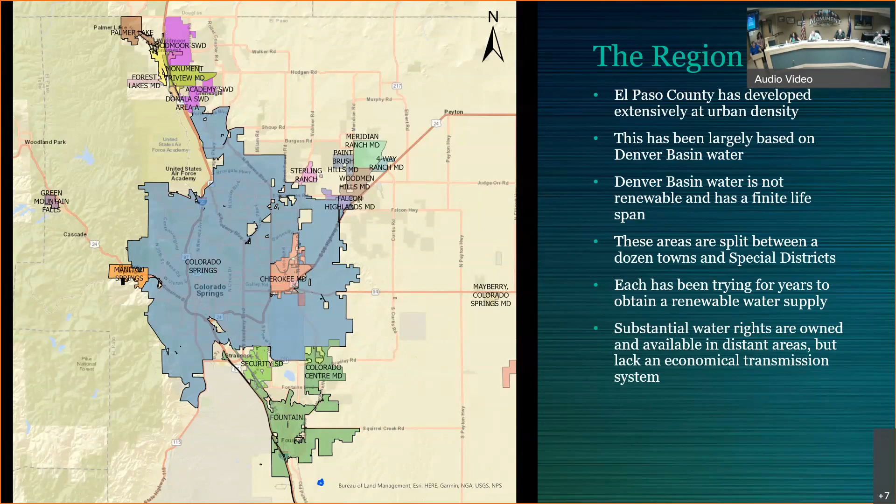There's some debate on the Dawson Aquifer and how much recharge it may or may not get, but ultimately I think the take home for this discussion is Mother Nature's not recharging these aquifers, and there's a lot of people with straws down in them. Over in Woodmoor, we see declines of anywhere from 15 to 30 vertical feet per year in our wells, and they continue to decline. What that means is the production rates decline with it. So even if we shut the door on growth and said we weren't going to allow another tap, we're still going to have to continue to drill wells just to maintain our current level of water supply.

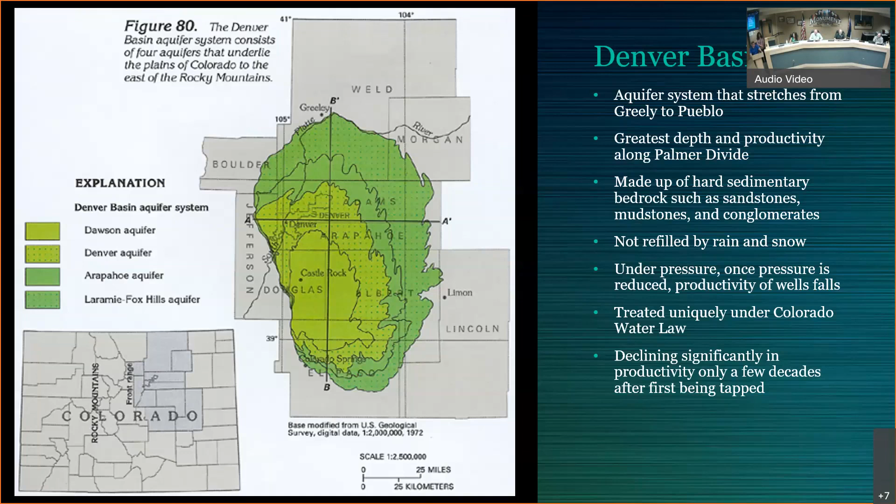That's what a lot of us face here, especially along the Front Range, when we're dependent upon Denver Basin aquifers. I can tell you right now, although Woodmoor owns a healthy portfolio of renewable water rights on Fountain Creek down by the city of Fountain, as Amy indicated, we don't currently have a way of going down there and piping those water rights up. So we are still, and always have been, 100% dependent on Denver Basin groundwater. Next slide, please.

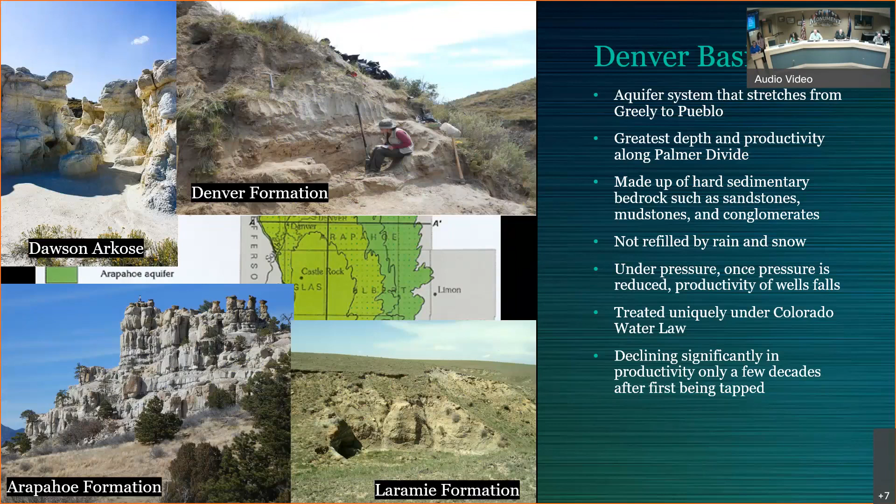Okay, just an example of what I'm talking about here.

With the Denver Basin aquifers, you hit diminishing returns as the water levels drop, and so do your production rates. Incrementally, it takes more wells, more money, and more effort in order to keep your production rate the same.

That's what you normally need to supply your community. Growth just exacerbates the problem. You've got to drill even more wells in order to supply water service to new customers. So the diminishing returns basically means well water is just going to get more and more expensive over time.

Just to give you an example, in Woodmoor we drilled a brand new Arapahoe well two years ago. We're probably looking at drilling another one next year, if not the following year. We'll probably be on that kind of time step with well drilling in the near term, given the growth that we're looking at.

So it's somewhat akin to mining Bitcoin. The next Bitcoin to fall out of the blockchain requires more computing power, more electricity, more inputs, more energy, and therefore more dollars. Mining Denver Basin aquifer water is about the same.

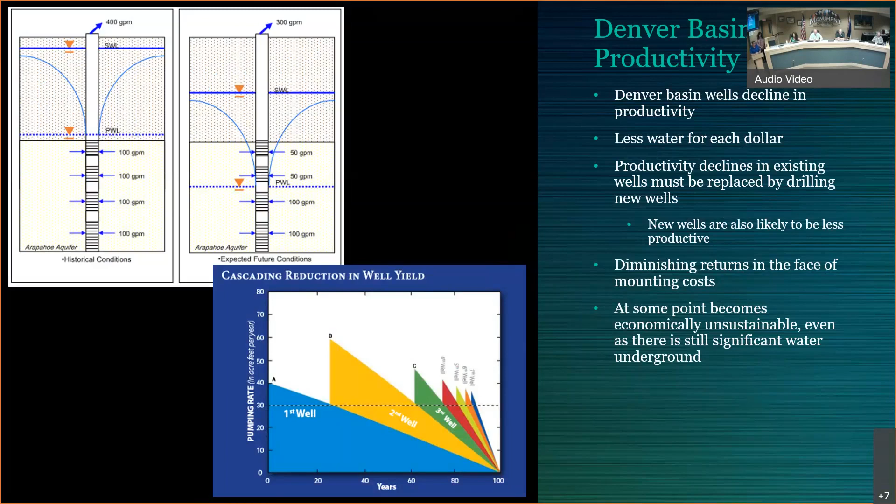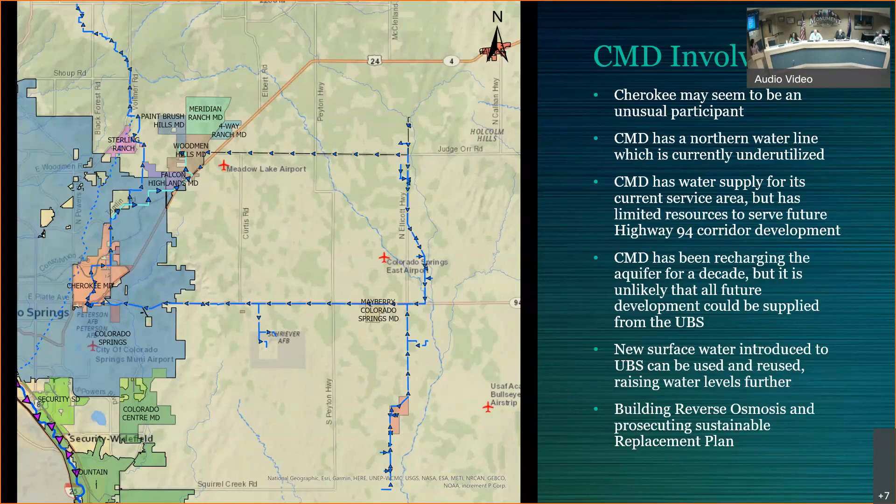So here is a nice map, shown mostly schematically, of the loop. The portion of the pipeline you see from essentially the north end of Cherokee all the way up to the intersection of Black Forest and Hodgen Road is the Sundance Pipeline. That's the 24-inch pipeline infrastructure that Cherokee Metropolitan District installed a number of years ago, and that particular portion of pipeline exists right now.

Down at the very bottom, the loop starts essentially at Callahan Reservoir. Woodmoor Water owns Callahan Reservoir and about 3,000 acres surrounding it down in the southern portion of the county. In addition, Woodmoor is also a majority shareholder in the Chilcott Ditch Company, a historically agricultural irrigation ditch company that drafts water rights off of Fountain Creek down a ditch about 8 miles and terminates them in Callahan Reservoir.

The thought process would be that anybody who wanted to participate, whether they had water rights on Fountain Creek they could draft off and put into the system, or if all they had was their non-tributary Denver Basin return flows discharged out of their wastewater treatment facilities, could at a bare bones minimum recapture their non-tributary wastewater effluent return flows and reuse them, transport them back up to the loop, reuse them, and then a portion would get discharged back into the creek, redrafted off down south at the Chilcott Ditch, and run back into the reservoir.

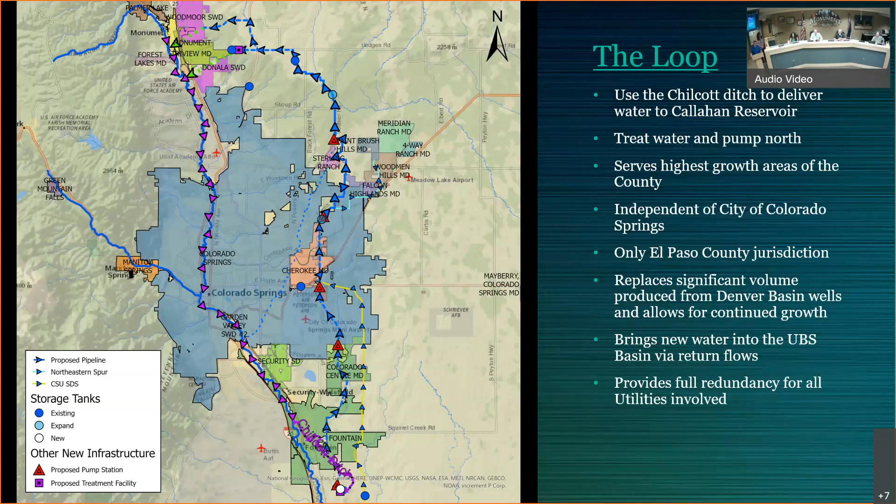Okay, a little more detail, a little more zoomed in. Here's the southern portion of the loop. At the bottom of the page you'll have Callahan Reservoir, and then the pipeline would run north, across Chilcott Ditch shown in purple, and continue north up to Cherokee, connecting into the Sundance Pipeline.

When water gets looped around and discharged into Fountain Creek or Monument Creek, which is tributary to Fountain Creek, the reusable water molecules that people can recapture and reuse would get redrafted off at the Chilcott Ditch headgate located on Fountain Creek, and then run back through the loop again.

What's also shown there on the right-hand side, or to the east, is, I believe, blue triangles and a yellow line. That's Colorado Springs' southern delivery system. Their Williams Creek pump station is about three-quarters of a mile due east of Callahan Reservoir.

So we see this project not as competing with the convey, treat, and deliver regional concepts that Colorado Springs is working on, but rather as two projects that can benefit from one another in terms of resiliency and other things. Next slide, please.

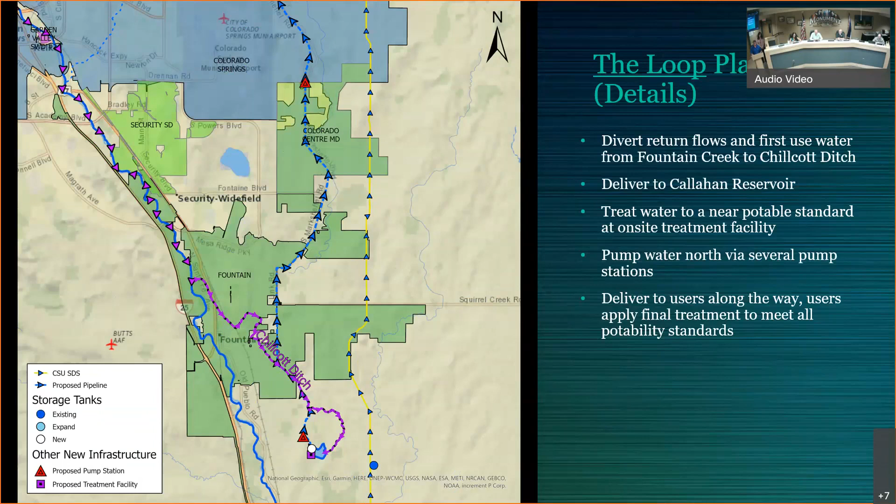And the big question, like we started in the beginning: what's the problem? The problem set is the Denver Basin wells—their sustainability, their pricing, their cost overall, and in the long term. How do we take the pressure off? How do we help resolve that? How do we have redundancy?

We've talked with all of these folks. They recognize this is a way for them to have the kinds of redundancy they need, especially when they have failures or reduced production in their well systems. So this is something that will allow for long-term sustainability, not only for existing customers and providers but certainly for new customers as they come online.

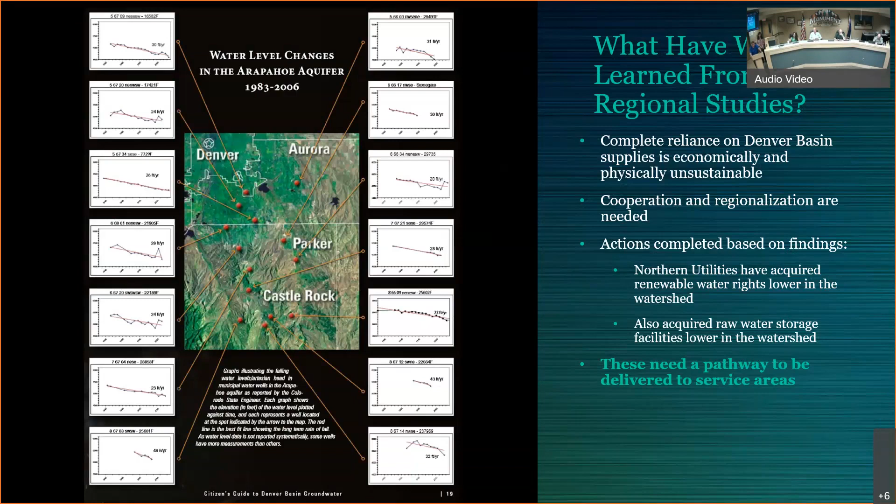So in terms of water yield, it's about 1.24 to 1.82. This is the concept I was talking about: you take a molecule of water, suck it out of the Denver Basin, non-tributary to the stream system, and send it to your customers. Hypothetically, half gets put on the ground for irrigation, the other half is internal use, runs down the drains, ends up at the wastewater treatment facility, gets cleansed and discharged into the creek. That molecule, or half a molecule in this instance, is reusable to extinction.

So you can draft it off the river at the Chilcot Ditch head gate, run it through the system. It comes back, gets cut in half again, a quarter runs into the stream system, and you go round and round and round. By the time it gets used to extinction, accounting for losses in the reservoir from evaporation, stream flow losses, transit loss down Fountain Creek, and transit loss in the ditch system, you come up with, on this diverging series, a multiplier of about 1.24 to 1.82, depending on if you line the ditch and do some other things that reduce losses.

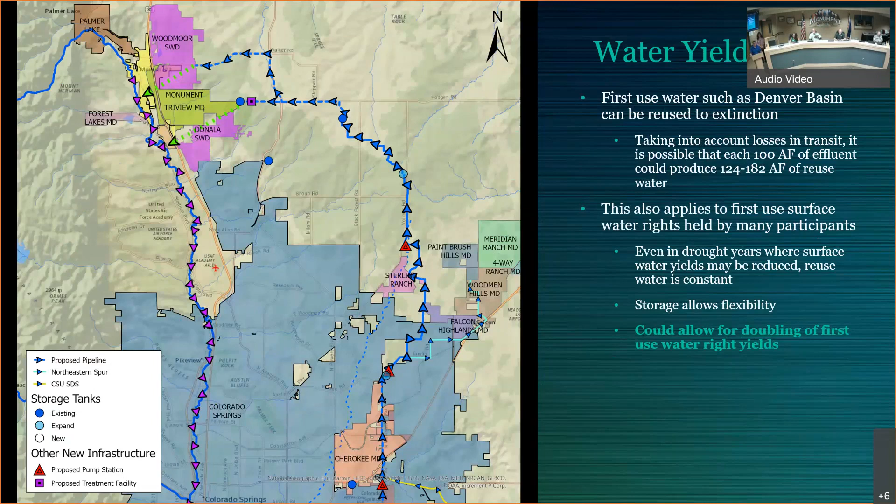So in terms of alternatives, this particular project, the Loop project, with just a little bit more infrastructure, could connect up easily to Colorado Springs Utilities and the Southern Delivery System. So just because an entity might favor Colorado Springs Utilities, or think that's the direction they want to head with a convey, treat, and deliver contract through them, doesn't mean they can't participate in the Loop project. They could participate in the Loop project and all its facilities.

Instead of running their molecules of water through the Loop, we just take them out of the reservoir, treat them to an almost potable standard, and then they can boost that water directly into the Colorado Springs Utilities raw water system. It would flow north up the SDS pipeline, get cleansed and treated to potable standards at Colorado Springs' new Bailey water treatment facility, and then get discharged to that particular convey-treat customer, however their contract reads.

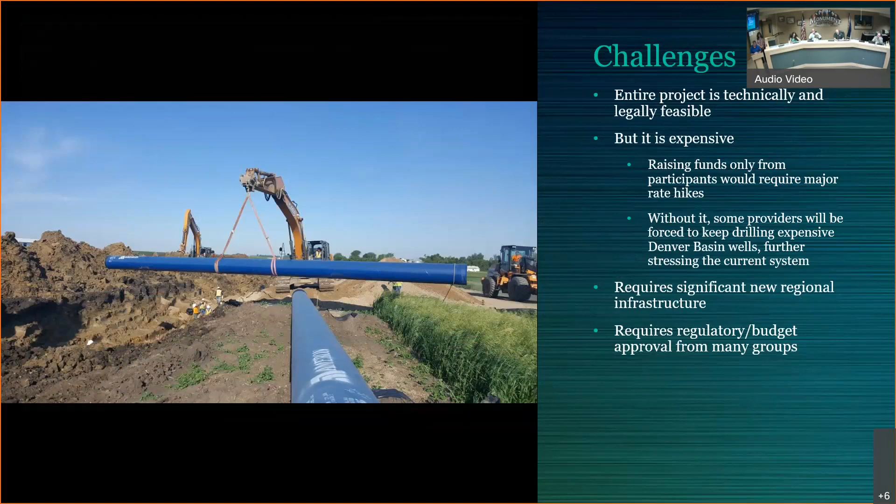Thank you. My favorite slide. I've also spent years in this county looking at all these water issues, 9 years over at El Paso County with the commissioners there, and we've been having this conversation for a long time — years here with Cherokee and working with this regional group. I think we're closer now than maybe ever before with a very real, very realistic and possible water connection.

I know that 134 million sounds like a lot of money, and it is. You have to look at water pipeline costs right now — you can't even look at a mile of pipeline before spending $1 million, and that's probably the lowest possible estimate per mile. That doesn't include your lift stations and your treatment. So it is very expensive to move water around the region.

But water is absolute. And if you don't have water, then all the highway issues, all the DHS issues, and all the funding issues that we all talk about — that you as a board talk about for your town, and everyone talks about on a municipal level, a county level, et cetera — doesn't really matter, because you have to have water.

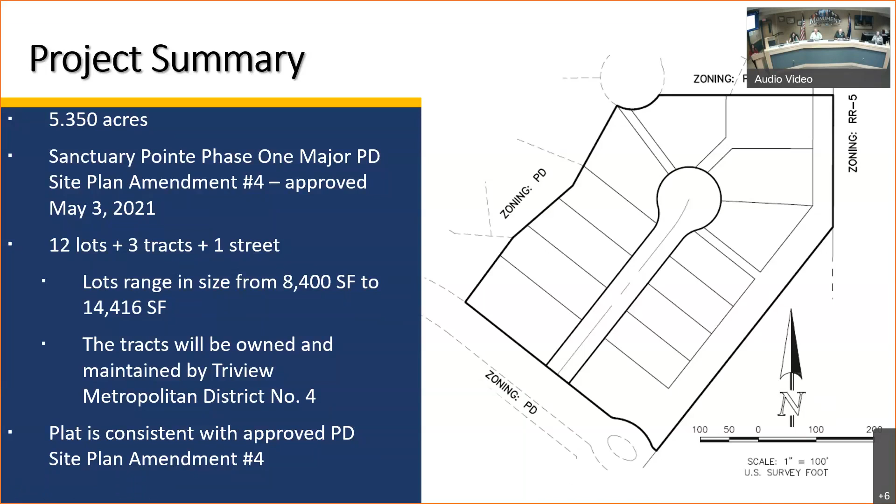Any other questions from the board for town staff or the applicant? This is a public hearing item, so I will open it up to the public. Mr. Anderson, do we have anyone online that would like to speak for or against this item? Do we have anyone here that would like to speak for or against this item? Sir, would you please come up?

Mr. Mayor and town trustees, I suspect nothing will be achieved by my statement, but someone has to say it. Best I can tell, Monument started out with roughly 560 acres of forest. This was done by measuring areas on Google Earth with their measuring tool. We now have roughly 310 acres left because Classic cut down approximately 250 acres of trees, almost half of all the forest in the town of Monument. There is never a reason to have 6,000 square foot lots in the middle of a forest, as Sanctuary Pointe does.

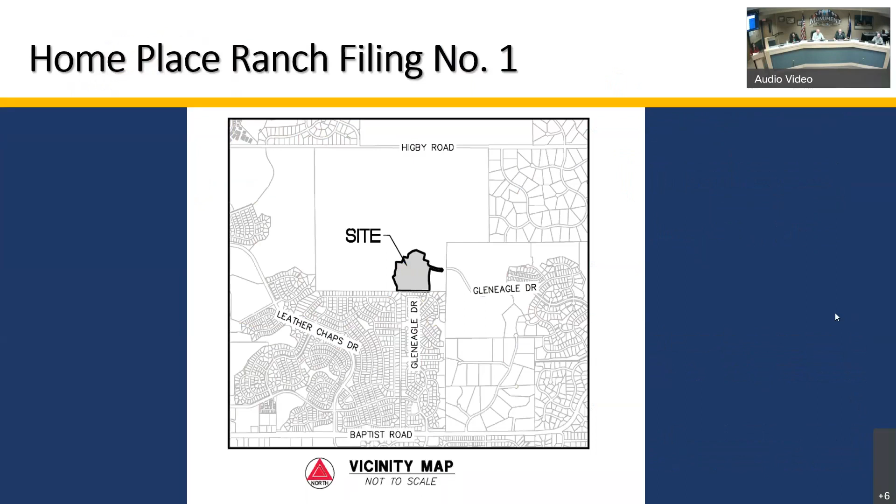It's north of Gleneagle Drive and north of Homestead at Jackson Creek, and west of Sanctuary Pointe. Sorry, forgot to put the map up. Filing number 1 is 22.3 acres in size. Home Place Ranch Phase 1 Minor PD Site Plan Amendment number 1 was approved administratively in August 2021.

The changes made in the minor amendment depict an increase of 8 single-family detached lots, from 67 to 75. Future filings will balance out the approved 300 lots.

The applicant will construct Sanctuary Rim Drive to the town's roadway standards with their construction document submittal. Also, prior to recording the final plat for filings 4, 5, 6, or 7, Home Place Ranch LLC shall construct an interim extension of Gleneagle Drive, extending from the north side of the intersection of Gleneagle Drive and Sanctuary Rim Drive up to Higby Road. The roadway shall have a minimum paved width of 33 feet, and the 90-foot right-of-way for the roadway shall also be dedicated at this time. This requirement shall be waived if the full design of this segment of road and the proposed improvements on Higby Road have been approved and funded through agreements currently pending with Triview Metro District.

Filing number 1 consists of 75 lots, which makes up about 42% of the filing, 6 tracts and 7 streets. The lots range in size from 4,467 square feet to 10,555 square feet.

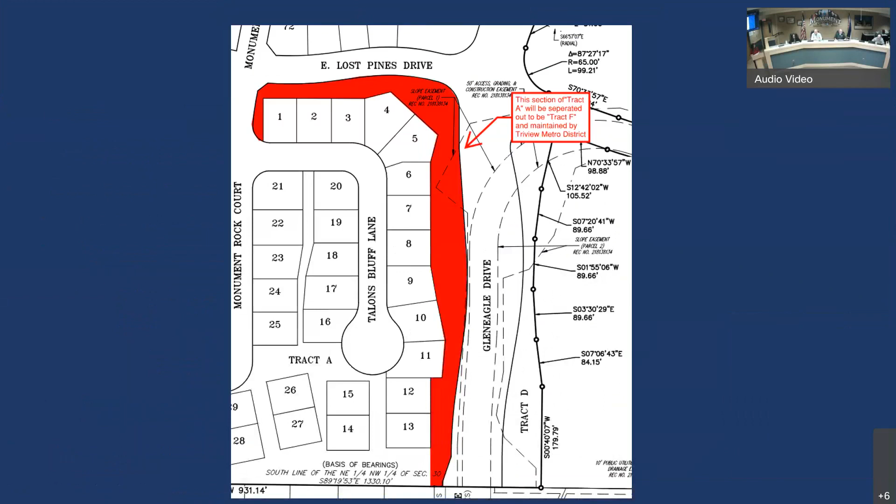The tracts and open space will be owned and maintained by Triview Metro District number 3. Tract A will be split into 2 tracts, Tract A and F, and said tracts be depicted as part of the final plat prior to recordation. As shown here, this was not included in the plat that you reviewed for tonight's hearing; this will be a condition presented later in the presentation.

These 2 tracts will be owned and maintained by Triview District number 1. Tracts A through F will serve a variety of purposes, including public utilities, landscaping, and drainage. Water and wastewater services will be provided by Triview Metro District number 3. The plat is consistent with the approved minor PD site plan amendment number 1, and all applicable code standards are met.

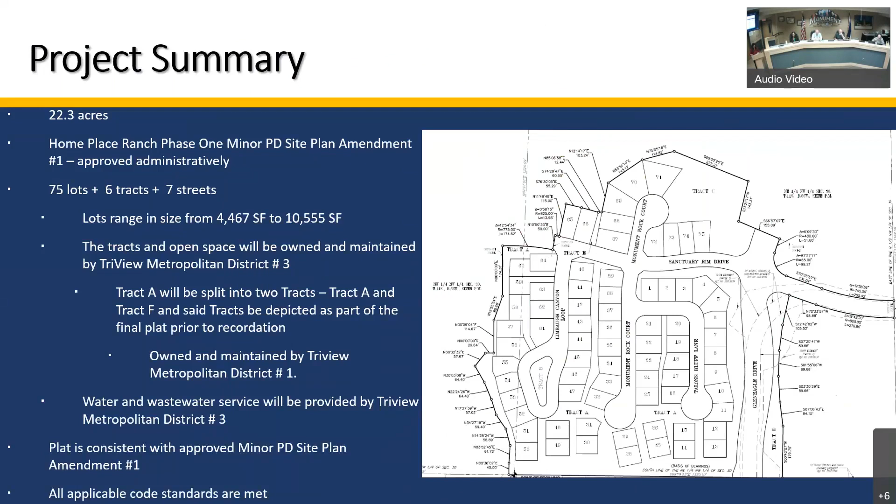Next, it's Home Place Ranch filing number 2. This is within phase 1 of Home Place Ranch, west of filing number 1, north of Homestead at Jackson Creek, and west of Sanctuary Pointe.

Filing number 2 is 16.6 acres in size. Home Place Ranch phase 1 minor PD site plan amendment was approved administratively in August 2021. The changes made in the minor amendment depicted a decrease of 3 single-family detached lots from 70 to 67. Future filings will balance out the approved 300 lots of Home Place Ranch.

Filing number 2 consists of 67 lots, which makes up about 61% of this filing, 2 tracks and 5 streets. Lots range in size from 5,292 square feet to 10,437 square feet.

The tracks and open space will be owned and maintained by Triview Metro District number 3. Tracks A and B serve as a variety of purposes, including public utilities, landscaping, and drainage. Wastewater and water services will be provided by Triview Metro District number 3.

The plat is consistent with the approved minor PD site plan amendment number 1, and all applicable code standards are met.

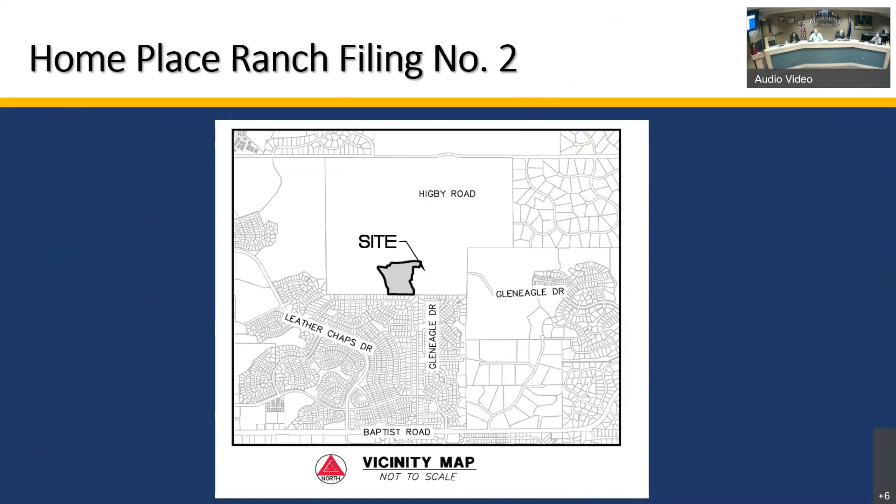Let me just go back to show you what that was again. And that was this. Next. Sorry to make you dizzy.

Planning Commission recommendation for Home Place Ranch, filing number 2. The Planning Commission recommends approval of resolution number 56, 2021, final plat of Home Place Ranch, filing number 2, based on the findings that the final plat complies with the review and approval criteria from the Town of Monument Municipal Code, Section 18.02.260.c. And the applicants are here tonight from HR Green to answer any questions that you may have.

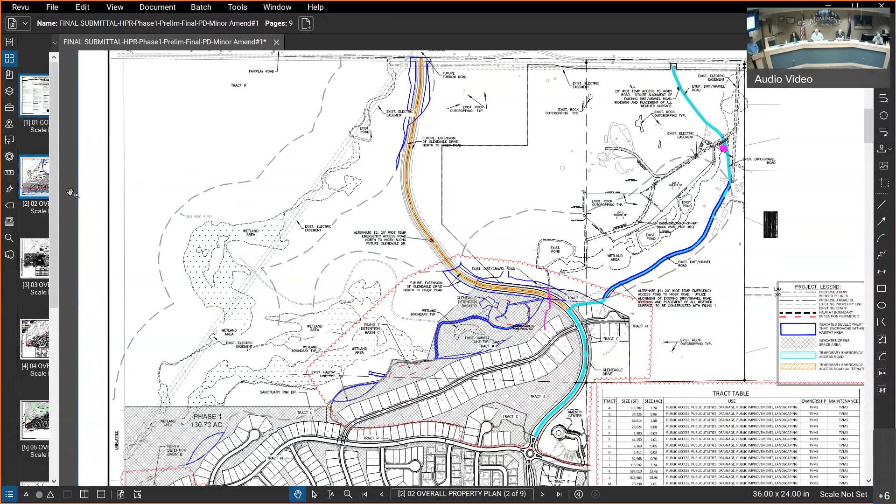Okay, so I guess the ultimate build out, I don't know, Ken, you want to speak to the ultimate build out of it at all? So yeah, the ultimate build out for Gleneagle, for the approved phase 1 for Home Place Ranch, was not included. So any future extension of the permanent road would be part of a phase 2 of Home Place Ranch or via another funding mechanism that I know the Tri-View Metro District is trying to work together to get that road extended. But in terms of the obligation for phase 1, the obligation is just to do the temporary road so that there's enough time for Tri-View to work out those agreements and also time for Higby Road to get improved

to a level where it's safe to connect to it. That was one of the issues that the county had, and it should be the same issue with the town having ownership—sight distances and a lot of issues with that intersecting or that connection, getting all that extra traffic up on Higby. So I know you're all aware of some planned improvements on Higby down the road. So until those improvements take place, it's not a real good idea to put all that permanent traffic out.

Okay. Other questions from the board? I guess I'm curious about the density. This meets our density, but these lots are tiny. They're postage stamps, if not less.

4,500 square feet. I don't know how many there are going to be that small. Some are going to be sub 6,000 square feet. What's the product that you're putting on these lots? Are these houses—single detached homes?

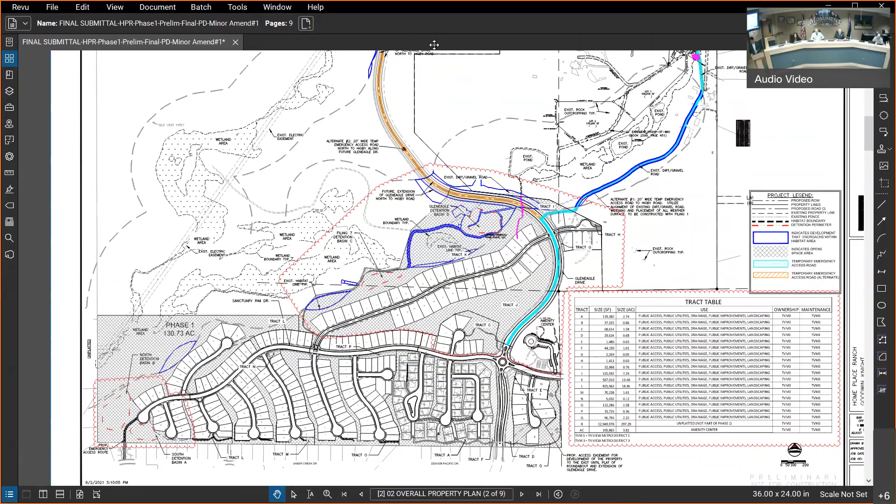Okay, and then I just want to reiterate something on the roads that Trustee Stevens brought up. So can you bring up a map of the first phase and the ingress and egress? Where is it going to be the primary entry to the development?

Gleneagle Drive is being extended, and then Sanctuary Rim will access into these parcels. And then the road that's going to head north to Higby, you're saying that in the first phase, the improvements will be crushed gravel, so they're not really going to be designed for the purposes of daily travel. Yeah, correct. And that was part of the emergency access only required by the Tri Lakes Fire District, but the county would not allow any sort of full access.

So it'll be gated off? It will not be gated. So people will or could use it? Illegally. And it will be signed. It will be signed, right.

Triview Metro. Well, this goes back to our ordinance on the rules of the road change. No one's going to follow it.

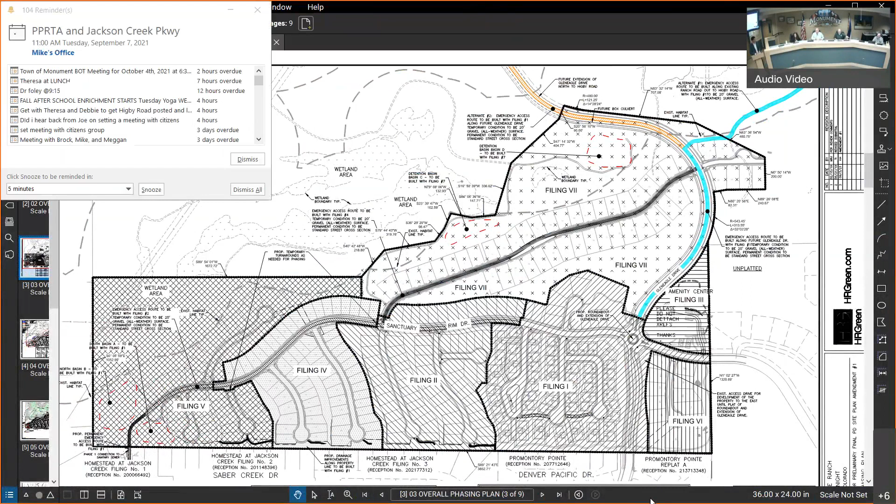So Triview is going to maintain this gravel road? Well, we will maintain it. The developer will maintain it. During the time that you're developing all your homes. Correct. And then you're going to turn it over. In what condition when it's all said and done? What will the road be?

You want to address the actual full section, and that won't be until the last filings, but address the full section of Gleneagle. That section will be a continuation of what you see on Gleneagle to the south. That same road classification continues all the way, but we'll only be building within the limits of phase one, which you can kind of see on the exhibit that's up right now. The bold line extends around — that's the limit for Gleneagle as part of phase one.

So everything, that'll be the full section, curb and gutter, utilities up to that bold line, and everything north of there would just be that 27-foot temporary road that would be extended as part of, triggered as part of filing 4, 5, and 6. Okay. I know you're going to be hearing some comments about this beyond me.

Any other questions or comments from the board?

Okay, this is a public hearing item. Mr. Anderson, do we have anyone online that would like to speak on this item? Okay, do we have anybody present that would like to speak on this item? Yes, sir.

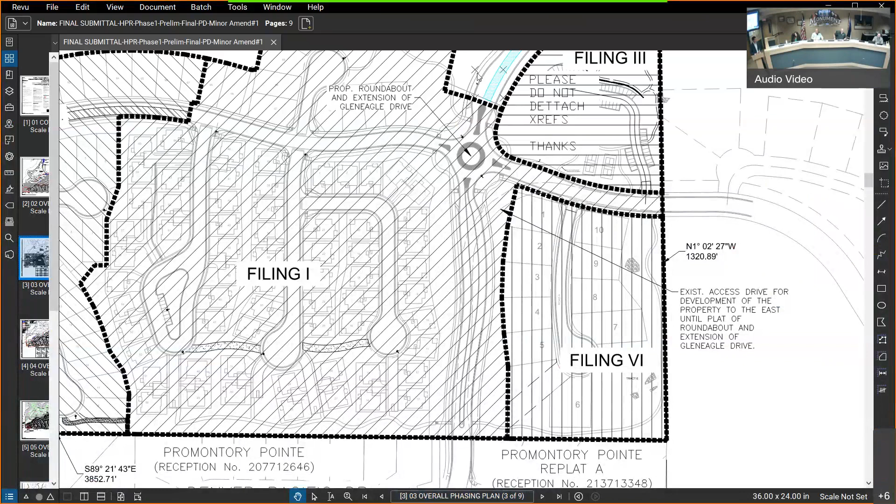Next, as far as the safety on Gleneagle, south of us, of course, is already constructed. We can't do anything about that. Our property is separate. However, what we did on Gleneagle, if you look at it closely at the plan - I don't know, Megan, if you could bring up an overall site plan on this - Gleneagle, we actually put some curves in it and did some undulating of Gleneagle, as well as put a roundabout at Sanctuary Rim Drive that you can see up there in the northeast part of that graphic. That was something that came out of the original plan development approvals by the Board of Trustees to have some traffic calming. So that was our contribution on Gleneagle, where if you look south of us through Promontory Pointe, which again is not our project, none of that was put in place.

I'm sure all of us in this room wish that they would have done a roundabout or some other traffic calming things through Promontory Pointe. But unfortunately, they did not. And unfortunately, there are some blind spots that Mr. Kimball pointed out. There's several blind spots when that road was designed, and probably wasn't the best design in the world. But again, that wasn't our part. So we tried to do our part on our property by putting some very slight curves in the road and things like that to help slow traffic.

A lot of those other safety concerns, the speeding and stuff, I think Mr. Hudson had some conversation before about enforcing these things. A lot of that stuff is out of our realm to be able to enforce. It's part of the police department to enforce the laws that you have in place on Gleneagle. So certainly we can't do anything about that.

But we try to play our part on our property. Looking down, scanning through all my notes I took, I think that covers a lot. I think Ken's going to come up and just supplement some of what I just said with some from an engineering perspective. Then we'll see if there's any remaining questions.

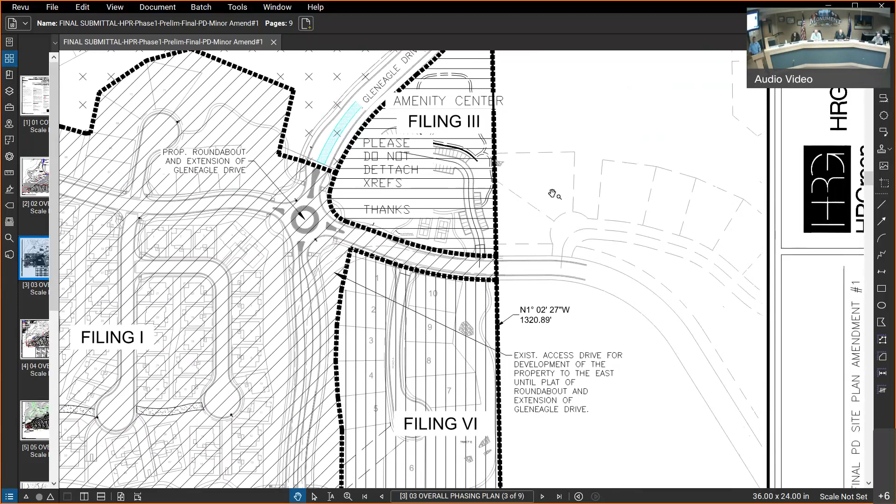And I do want to reiterate a point I mentioned before, which I think was a concern of the county and should be a concern for everyone. Before that intersection can connect to Higby, there really has to be some improvements on Higby, which are still in the works. Tri-View and the town have just finished a study analyzing that, so I know there's a plan in the works, but it's just going to take time for that plan to get implemented and funded to a point where it's actually safe to bring all this extra traffic north to Higby. So, valid point. Everybody wants to see Higby go through right now, but at this point it's just not feasible, nor was it in any of the agreements we had. That said, we did concede as part of that negotiation to trigger that at an earlier date. So hopefully at that time there'll be funding in place for full improvement on Gleneagle and also Higby.

Just one more thing to add on Gleneagle that I didn't talk about, which was brought up, is about when the original traffic study was done, early 2019 when we did our study. Our traffic consultant went through and proved that Gleneagle is a major collector and can handle all the traffic from not only Home Place Ranch, but also from Sanctuary Pointe. And not only that, the intersection down at Baptist and Gleneagle can also handle it.

I think by the time Sanctuary is built out and Homeplace was built out, that intersection was still not going to be at capacity. Don't quote me on this, but it was still going to be like 60-70% of capacity on that intersection, something like that. So all this development can be handled.

Now, I get the concerns of the neighbors that it's unsafe for children to be walking across and everything. I've been in Gleneagle probably 50 times, and I've seen the same exact thing. But again, we've played our part on our property. We can't fix past problems or maybe mistakes in the way Gleneagle is designed south of us. We feel like we've done everything we could do on our property.

Some of the other things that were brought up had to do more with the process of the sketch plan and PD. I don't know if you guys want to address that, up to you, but I don't feel that's probably my part to get into the details of. So with that, we'll conclude our answers, but if there's more questions, we certainly will answer those.

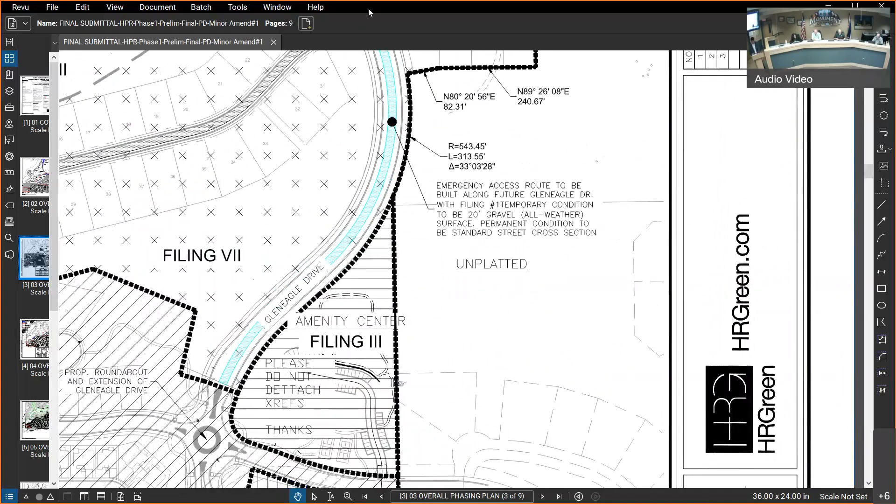Questions from the board? So from a timing perspective, because I wasn't here for the original 05, 06, whenever this started up until recent, do we have any expired applications that we are dealing with that have not been resubmitted properly and have been voted on in front of the public?

No, because I would say the sketch plan is approved, the zoning was approved. The next step in the process is a preliminary and final site plan, which was approved by the board in the year — it's getting away from me — 2019. Thank you very much. 2019. So that's the next step. That preliminary final site plan vests the property right, so that's the document that is the go-to as they develop this first phase of development within Home Place Ranch.

That is the piece, so I wouldn't say that the sketch plan is expired now, because this document is approved and now this becomes the governing document. It's more specific than the sketch plan. I would have to look into how that provision impacts the other portions of Home Place Ranch. However, those other portions of Home Place Ranch could potentially fall into the old code, but again, I'm not prepared to comment on that moving forward. I'd have to look at the previous code versus the code that's in place today related to all of the timing and how that all occurred on a timeline.

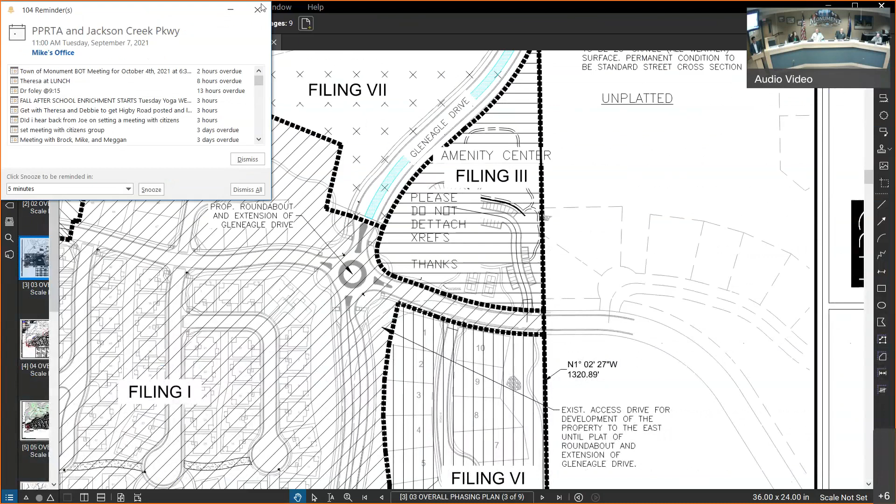Are we able to make comments at this time, or do you want to wait till your discussion is finished? Go ahead. So 2 critical items here. First of all, the notion that it's a violation of your code with 2 points of access, we will pull that map back up. There we go. Thank you. So, Meggan, I may need your help with pointing out a couple of things. Number one, as part of filing 1 and 2, we do have 2 points of access.

Okay, we have Gleneagle. We have Sanctuary Rim Drive, if you can point those out, which is off to the east that goes through Sanctuary. So those are 2 points of access into our property for filing 1 and 2.

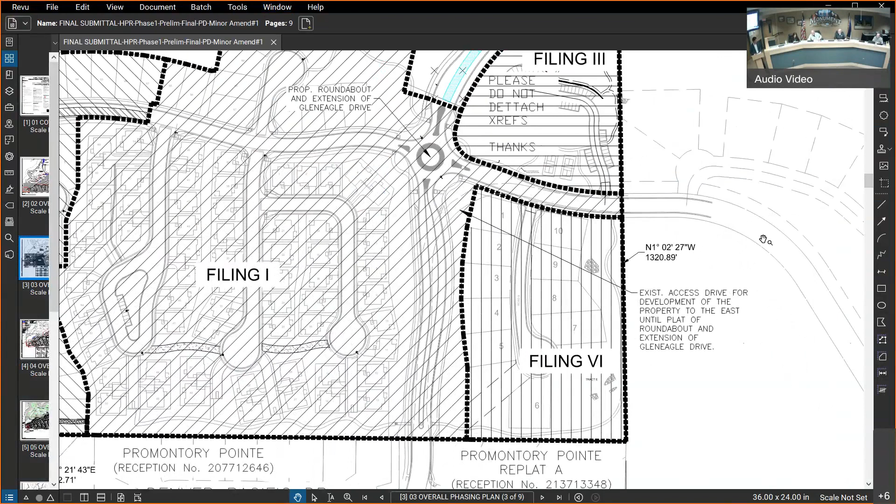Okay. Wait, now does Sanctuary Pointe, where does it go? Can you point out Sanctuary Rim? If you can see where it... does it just go into another, what do you call it, cul-de-sac area? No, it goes into no outlet, then Sanctuary Rim that goes east, you saw the roundabout that was up there. The road that goes east is Sanctuary Rim, and that goes through Classic Home Sanctuary Pointe community all the way over to Baptist.

That's their collector road that goes through their entire project, coming into Home Place Ranch, and that's their second point of access. I brought this map up here on the screen so you can see it.

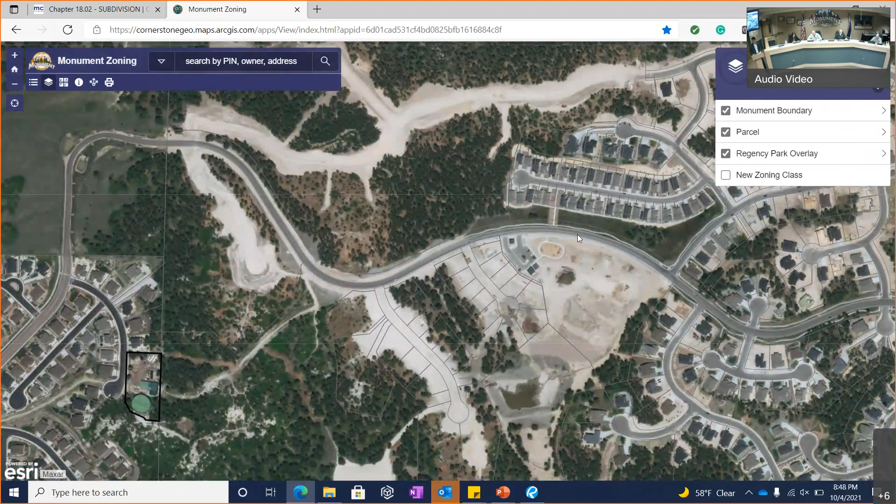This is the temporary road design. Hopefully this helps. This is Sanctuary Rim that goes all the way through Sanctuary, and it is all connected and constructed and built.

It comes out right there at Baptist. So that is our second point of connection into filing 1 and 2. I want to make that clear. And then as far as this change of building Gleneagle and the timing of that,

as Meggan was pointing out, on the previous approvals the Board of Trustees approved that we could build up to 300 lots. Through negotiations as part of the amendments to that PD, we got it down to 142 lots. So after 142 lots, we were going to make a connection to Higby.

So it's already been approved by the Board of Trustees. We've already made concessions in the past, and those were approved. To go back on those original agreements, I would highly question that.

Well, the only reason the approval occurred was because of the requirements of the county, and the county required the access road. So that's my concern.

So anyway, my point is, given that there's a possible annexation of the road, can you change the rules on the developer? If it's already approved, can you say, well, now we're not going to approve this because we might be able to build that road sooner?